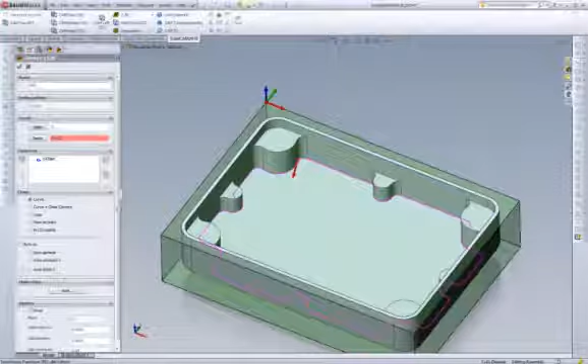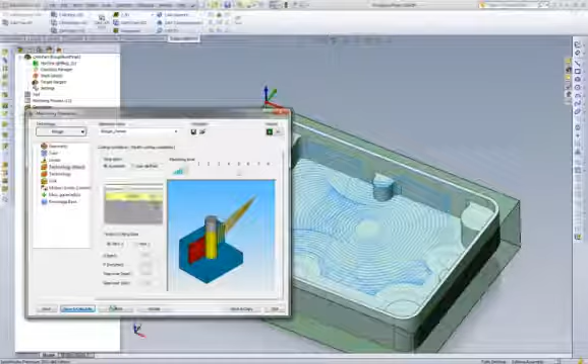We'll go select our tool. The first tool we're going to use is a 1/4 inch end mill. And we're going to use level 5 in our iMachining wizard. We'll take a look at the toolpath. Here we can see it roughed out. Take a look at it in Solid Verify.

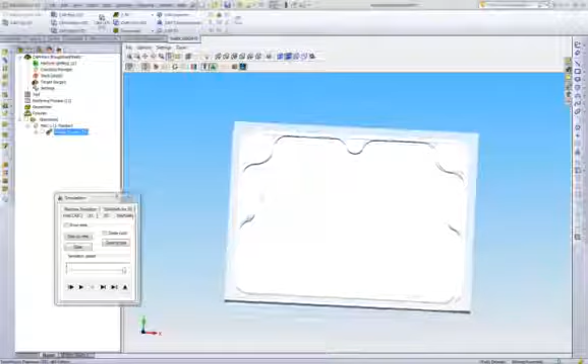If we look at our finish model, we can see that we have material in all the corners and also on the wall. So if we want to rest rough this operation first before we go to finishing, all we do is click Save and Copy. We switch our technology to rest. We go grab our smaller tool. We're going to stick with the same level 5 in our wizard, and we calculate.

iMachining is smart enough to automatically use the last operation as its rest material. If we move to our Solid Verify and slow it down, we can see it now rest roughed the entire area. Now if we slow this down to a very slow time, we can see what's actually happening.

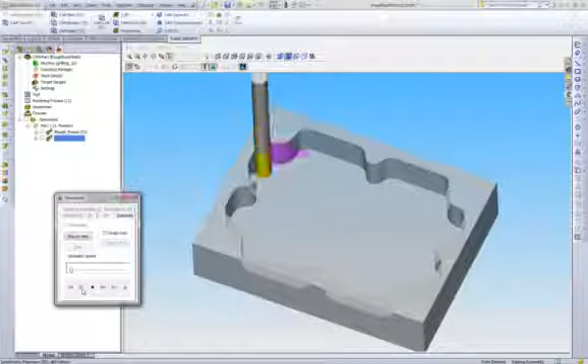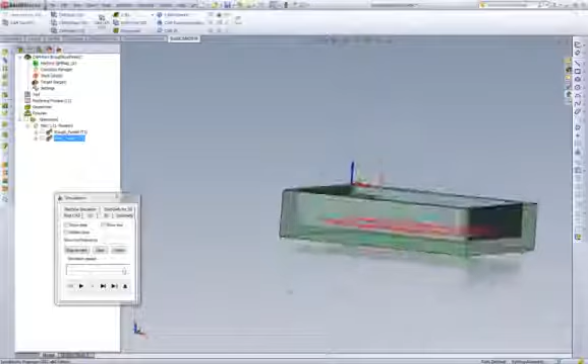The first thing that's happening is it's taking away, in one pass, the leftover material on the wall. As we speed it up, once it finishes with that, it will then move to its corners, taking away all the material in the corners. If we look at this in the host CAD, as always with an iMachining toolpath, no retracts. Tool stays down, not getting any unnecessary air cuts.

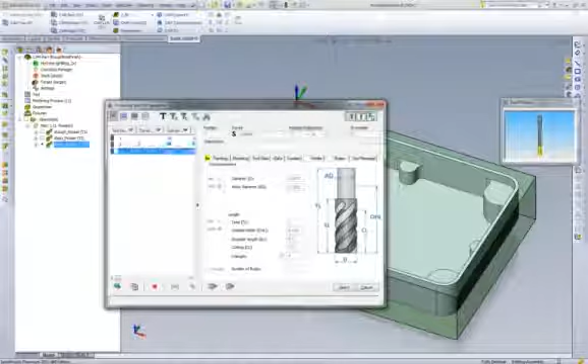Now we want to go to finishing. So we save and copy that operation again. We click finishing. We go to our 1/8 end mill for finishing. We'll stick with our level 5 again, and we'll calculate.

Now finishing is going to do something different than rest roughing. It is going to be based on the rest roughing operation, but what it's going to do first is it's going to clean out all of the areas that are bigger than the wall offset. So what we're doing is we want to be able to take one final pass around the contour at the programmed wall offset.

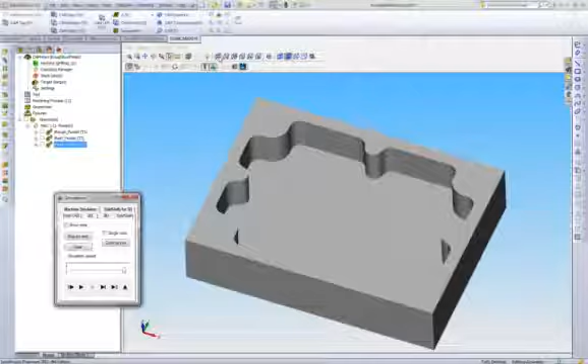So if we go to a top view and look at this, we can see all the corners are being removed first. We'll go back to our isometric. Slow it down. We see all the corners are being removed in preparation for a final finish pass. And then we get our final finish pass at the programmed step over, or wall offset.

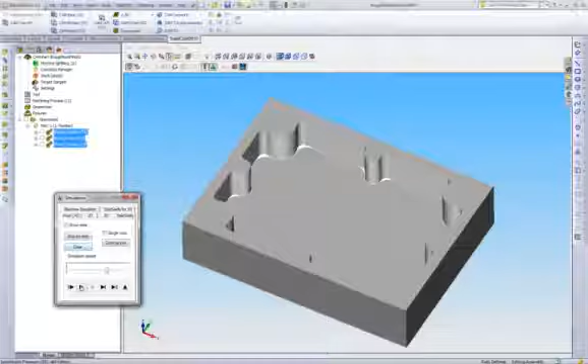If we simulate all three of these together, we'll take a look and see what we get. So we have our roughing toolpath, which is clearing out the bulk of the material. We have rest roughing after this, which is taking a smaller tool and progressively shaving away all of the material, where most of it is left over in the corners in this scenario.

And then after the rest roughing is done, we're going to move to our proprietary finishing technology. In our finishing technology, we automatically clean out all the corners and then move to one final pass around the wall.

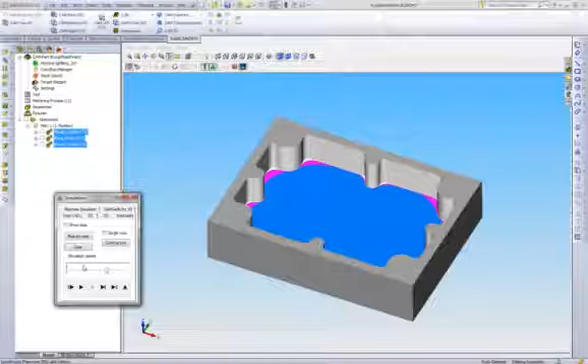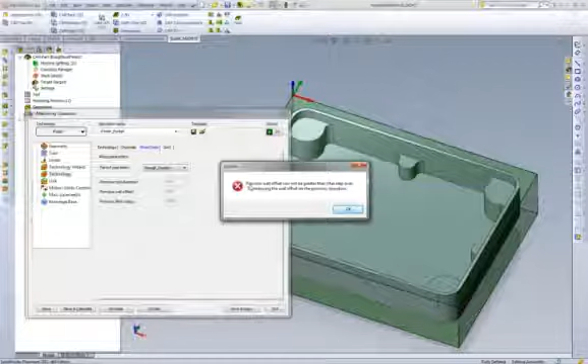Now a lot of customers go directly from roughing to finishing. So what would happen if we wanted to do that? So what we'll do is we'll suppress this rest roughing operation. We'll drag it to the bottom and we'll go to the finishing. What we're going to do now is tell it to work off of the roughing toolpath. In this instance, we can see that SolidCAM is warning us and telling us that the previous wall offset cannot be greater than the maximum step over.

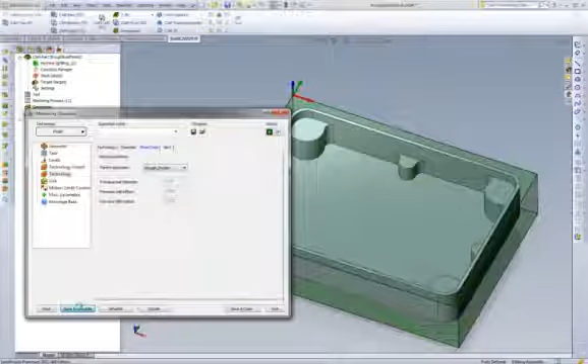So to do this, we're going to go to our roughing operation. We see that we were leaving 10 thousandths on the wall. Naturally, we are not going to take away the full 10 thousandths in one pass with a 1/8 end mill. So we're going to lower this down to 3 thousandths. Calculate our toolpath. We're going to move back to our finishing. Pick the rough pocket. Now when we calculate, we do not get any errors, because now we're roughing to the good wall offset that the finishing tool can take in one pass.

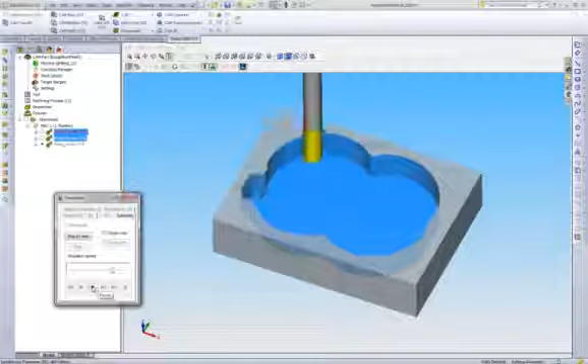Now if we go to our simulation and simulate both of these, we can see here's the roughing toolpath, same as it was before, but now roughing to 3 thousandths. And then after that, the finishing is going to come in to all the corners, finish all the corners to prep the final finish pass to be the step over that we defined.

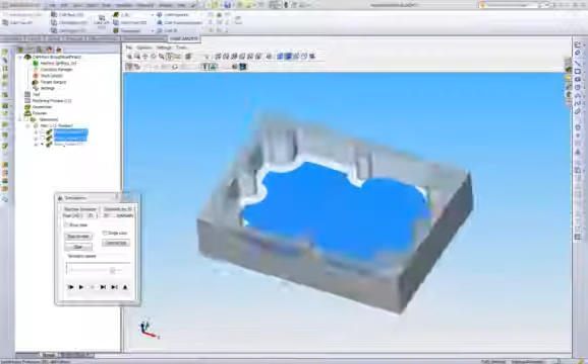And that's how simple it is to go from roughing, rest roughing to finishing, or you can go directly from roughing to finishing if you like.